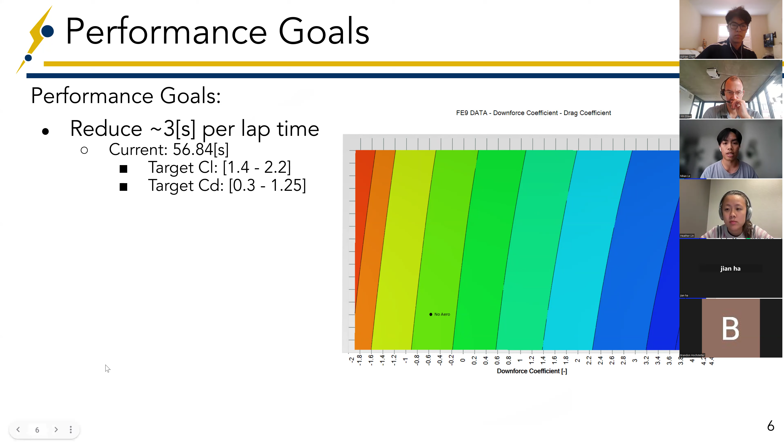Jian will talk about the front and rear design. So this is our current concept for our front and rear wing.

An issue we initially had was that our initial design had 3 elements for both our front wing and rear wing, but we had issues with our center of pressure being too far forward. So we decided that switching up the elements would help change the balance and bring it back, and also make a less aggressive airfoil setup. So our front wing now has 2 elements and a curved end plate for the trailing edge.

This is to ensure that airflow goes around our tires instead of hitting it. And then for the rear wing...

The rear wing has 4 elements, and in 2 slides I'll explain why I chose that specific airfoil configuration. The notch on the top trailing end corner is to reduce the vortex that forms off the edge, from the high pressure air spilling over on the outside of the end plate.

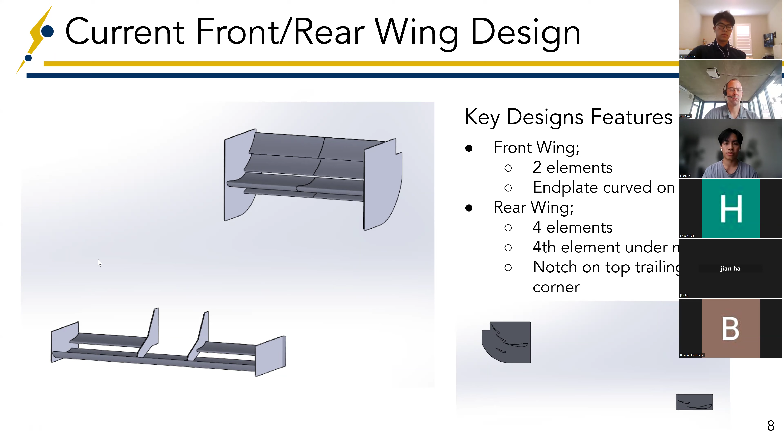For Nan, do you want to explain the under tray? Yeah, so for our general under tray design, the key features are a rear diffuser as well as venturi inlets and outlets. The side outlets are kind of a best of both worlds, helping with our side radiator cooling as well as improving our downforce.

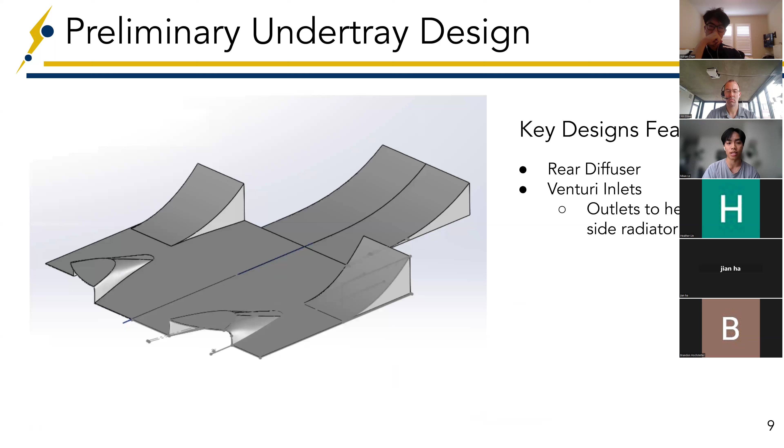This is the actual airfoil of the rear wing. We found that we wanted at most 2 different chord lengths, for composite sake, to make it easier to manufacture so we don't have to make so many molds and spend weeks and weeks.

So we decided that if we want to use multi-elements, we would use the same chord length for the secondary, third, and fourth elements. We went with 300 millimeters for the main element at -1 degrees angle of attack. The second element is 150mm at 35 degrees, the third is 150mm at 55 degrees, and the fourth is 150mm at 25 degrees.

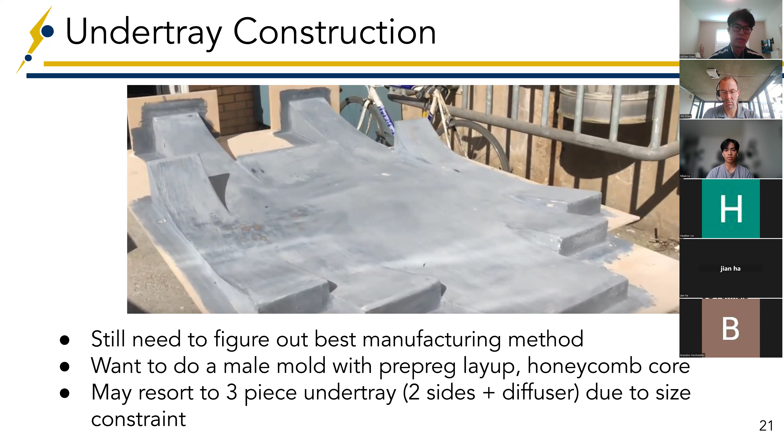Here's a small timeline for how we want to go about this. From now until around the second week of fall quarter, we'll start making our test pieces and our molds.

Since our airfoils are mostly dependent on chord length and span, we can get a head start on making those molds in fall quarter. Around the first month of fall quarter we'll start making the molds, and hopefully by the middle of fall quarter we can start laying those shells up.

Once those shells are done, we can start manufacturing the end plates and ribs, which are 3D printed and laser cut respectively. Finally, we can hopefully water jet our brackets out of aluminum. We'll spend our winter break catching up if needed.

Once our chassis is finalized, we can design our mounting brackets for the proper loads and location, and hopefully manufacture those around the start of winter quarter, where we can also assemble our front and rear wing.

Then we'll take about a month manufacturing the molds for the nose cone and front panel, and lay them up for the next two weeks respectively. Hopefully we have our main aero components installed on the car by the end of winter quarter.

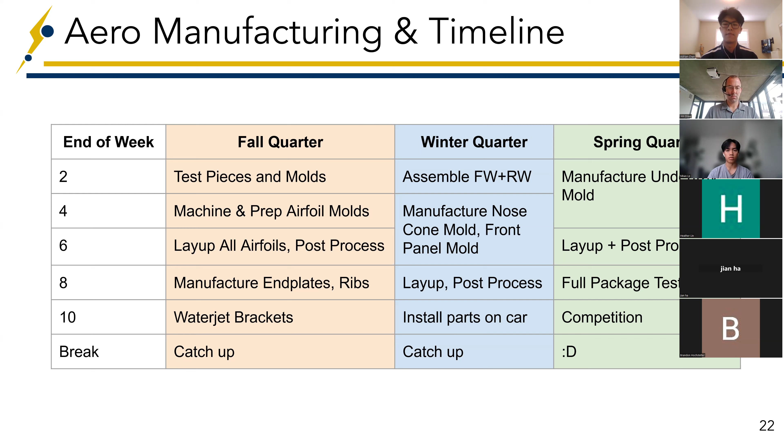That's all from me. Again, this is just a preliminary design, but I wanted to see if you have any comments, questions, or feedback.

I took 20 notes. Most of them are questions.

Okay, I'll start with the second half, Adrian. As far as manufacturing goes, I think you did a great job of explaining what you did and why you did it. I'll get to design and analysis, and to... I'm sorry, is it Jian? Yeah, okay, I'll get to Non and Jian second, but I'm going to start with Adrian here. Great job of explaining what you did and why. I'm leading, by the way, into the second half, right?

What's your plan of attack for different ply counts? You mentioned, I think it was the next slide or the slide after, that you're going to play around and experiment. Experimentation takes time, resources, money, and effort, right? So if you can reduce the amount of what-if scenarios, you can get it done quicker. Can you logically predict which one would be better, faster, smarter, whatever? That's with the process, wet versus pre-preg, right, and different ply count.

Set manufacturing aside for a second, that is a stiffness, strength, and weight optimization problem. So what are you thinking there?

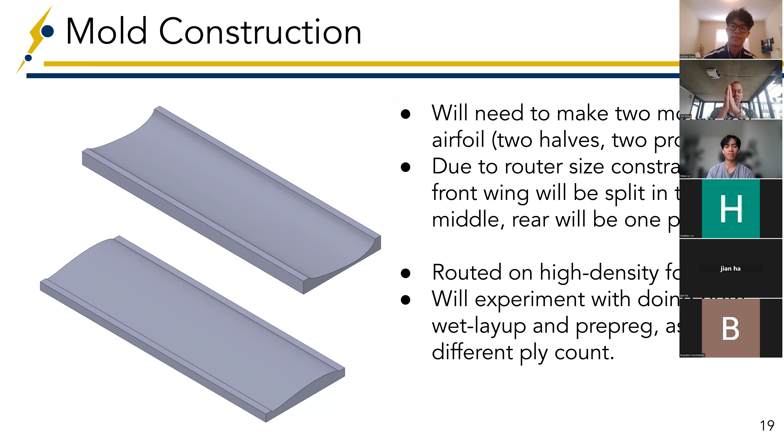Yeah, I mean, there's some simple hand calcs, right? A simple beam - a wing is just a beam, or a beam is just, you know, simply supported on both ends, for the rear, or however you're doing your mounting structure. Maybe you have a mounting structure in the front, in which case it's symmetrically simply supported. There's really, really simple hand calcs that will help you distill down to general order of magnitude. And you can do some simple hand, it's like linear math, right? Simple.

Fundamental, like just composite theory, right? And just say, okay, if I've got this layup, it's this combination of elastic modulus and bulk modulus - what's the stiffness of the structure, etc. So that's a simple stiffness and strength thing. You can just say, where's the max stress and can we handle it, right? And put some factor of safety on it. And you can easily calculate, you know, whether it's a foam core or is it hollow - should be hollow. So you can easily just calculate a corresponding cross-sectional area. So simple beam math, statics 101, just sort of a composite structure, just to get a ballpark.

Otherwise, with composites, nothing beats a quick and easy, dirty test. And I've actually seen a team do a quick layup, fasten it to the side of the bench and hang weights off it. And I know you're laughing, thinking like, well, what does that mean? Like literally, that's engineering. That's what we do in the garage. That's when we go racing. We want to know what's happening. And I don't want to make a perfect mold, go to an Instron machine, or use a third-party test house - all that extra money and time - just hang weights off and see what happens. Something as simple as that.

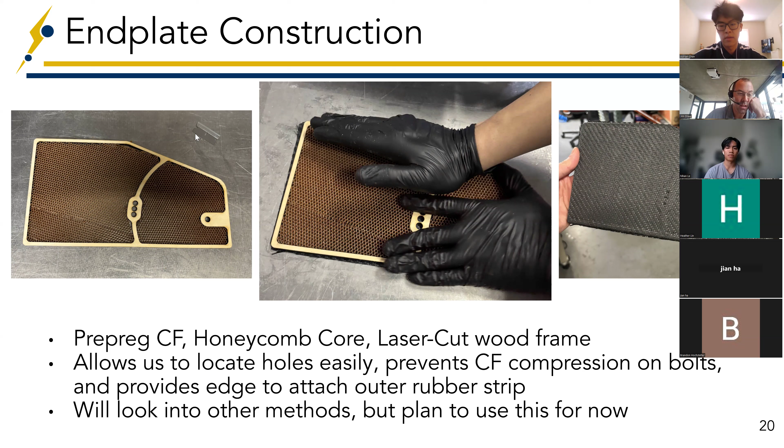So okay, that's it on the manufacturing side of things. The other 17 points of notes that I made, guys, are for the design and analysis side. So let's go all the way back to the beginning. Okay, let's go to the next slide. At first I wasn't putting slide numbers in, so I'm sorry. Yeah, go to, okay, right here.

Weight goals, where do these come from? These came from me. At comp this year, I was asking a lot of different teams what their weight goals were or how heavy their aero packages were. These were kind of the upper end of what I heard from teams, and I kind of wanted to set this as a target for us to beat, which should be pretty easy. I know a 10-pound front wing can be a lot, but one of our older alumni tried making a front wing, and it was also around 10 pounds. So we wanted to set that as our upper limit and try and shave weight from there.

If this is going to be your story, if this presentation is part of the story you're bringing to the design part of the competition, make sure you're ready to tell that half. Because whenever I see a goal, I always ask why, or where did that come from? And weight goals in particular, especially with a team first year Aero, I know you don't have years and years of historical data of manufacturing methods. So I'm already thinking to myself, like, where do these numbers come from?

Research is okay. Engineering, when we're doing stuff for the first time, we only have research, right? We don't have data. So going around and asking teams, I think, is okay, as long as you do many teams, and to your point, you're conservative with the numbers there. And then I'd like to also see, if I have my design judge hat on, by the way, we just told the team that we're going to add 45 pounds to the car.

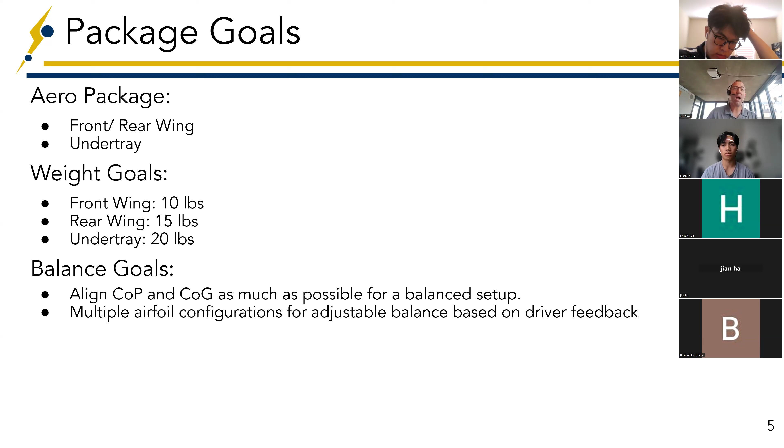That just means plow it. Come out of that turn, full throttle, and plow it, and you know that the car is going to be nice and settled, as opposed to plowing it and all of a sudden you get lift in the back, which would be very dangerous but fun.

Does that make sense? So I don't think this is going to require a massive design change per se, because you could probably just tweak a little bit of an angle of attack, which is an easy change to make in July. It's really easy to make angle of attack changes. Even if you decided on your airfoil profiles, you can just play with angles of attack and change that balance pretty easily. But I think you need to reassess your goal of putting the CP on top of the CG, especially since in a couple slides, you didn't know where the CG was.

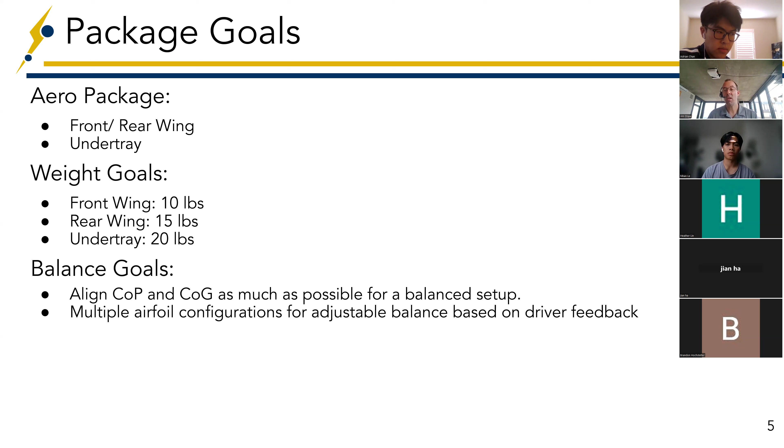That's a problem. That right there is a problem. And is the CAD like 75% complete, or what? Why don't you know where the CG is? That to me is a huge question mark.

Okay, so we do have the CG from last year, but the chassis that we're designing now is pretty different. The geometry is really different as well, and we just don't have the numbers because the CAD we worked on was only the space frame chassis. It didn't include the accumulator and its weight, the driver, or anything else.

Forget the CAD. If the CAD isn't like 80 or 90% complete, then it's not a helpful tool in telling you where the CG is. Really easy Excel math can help you. So what's the total weight of the vehicle from last year, or roughly this year?

640 pounds total weight of the vehicle? It's like around 280 kg. So 280 kg, okay. And that's with no driver.

So you got 280 kg. Now you got a driver that's going to weigh somewhere around what, 75? Maybe between, I don't know how small the driver is, right? 50 to 75 kg.

So think about it like this. You know where the CG is of your frame or your total vehicle. Now look at the largest sources of that weight. You got a driver, which wasn't in that number, you got your accumulator, which is just a big hunk of solid mass, and that's located somewhere. You just go down to last year's car with a tape measure, and then draw it out on a chalkboard or on screen or something and say, side view.

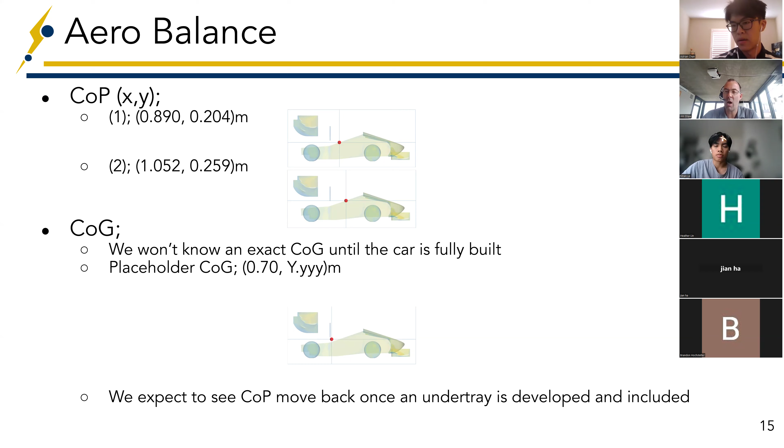Which was basically the number of aero elements and understanding how much downforce you wanted. What I always tell teams, which I don't see enough, is a side view. I would love to see a free body diagram. That free body diagram is going to say, I've got my center of gravity with some level of confidence and the reaction forces on the wheels. And I have my center of pressure of the front wing and its location, the center of pressure of the rear wing and its location, and the center of pressure of the diffuser tray, etc., and where that is.

It's literally 1, 2, 3 points that represent your 3 aero elements, and 1 point that represents your center of gravity. That simple picture and that simple free body diagram, for both downforce and drag, is such an important way to communicate how you approach what you expect for performance in the front wing, what you expect for performance in the rear wing. And those things will guide you.

How many elements in the front wing? How much downforce do we need to get? How many elements in the back and downforce? Because every time you add an element, you add mass, right? Adrian's got to justify that. He's got to build these things. He's going to add mass to the vehicle. And again, in the rear, it's above the CG, so you're raising the CG. Particularly with the fourth element that's below the other elements in the rear wing, I want to challenge that a lot, just because of how dirty that air is.

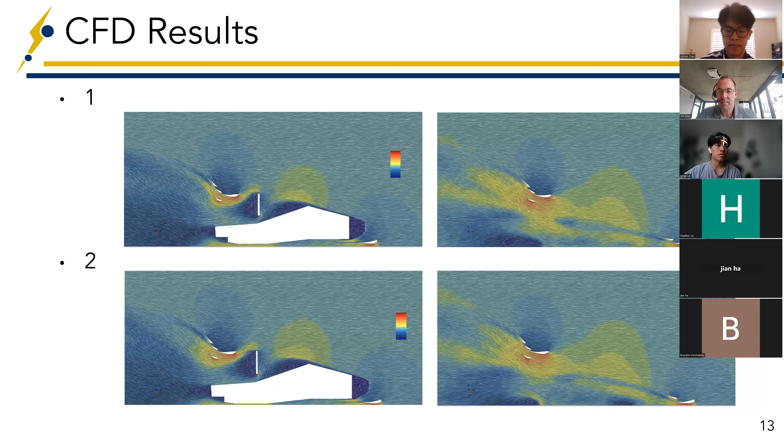Angle of attack slide. Let's get some pictures, if there's a way to communicate, go back one. There's sort of a matrix of different ways of doing angle of attack. I think it was something like this. I'm having a tough time absorbing this information, it doesn't have any context for me. So if there's a better way, you can have tables, because tables are a nice way in engineering to show data, but have some pictures in here too, just so I can understand what your sweep was and why. I see 0 to 30 on your winglet, but which winglet, where on the vehicle is it? Just a picture to give me some context. That's just engineering communication.

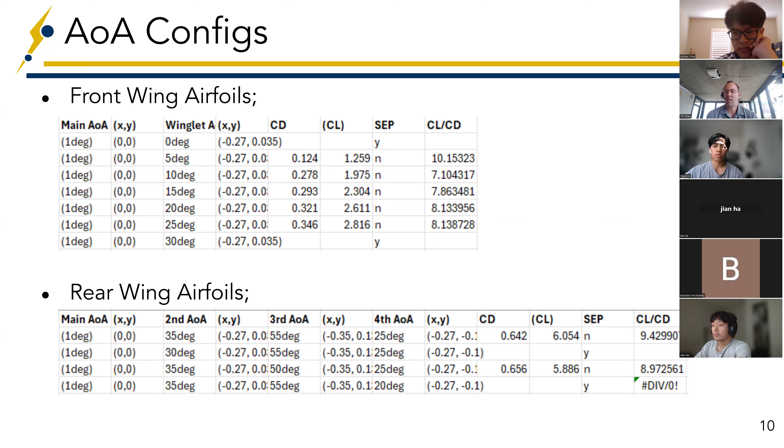Before you start showing any CFD, you've got to explain the CFD setup. You've got to explain, hey, this is our CFD model. Here's the inlet velocity, what is it and why. Here's the turbulence model that we used, and here's why. 2D models are good for just getting a general understanding, for beams and slot gaps, but you can't get accurate forces out of a 2D model, and you can't really get accurate turbulence out of it. So if you're doing 2D, that's totally fine, but make sure you understand it's a limited accuracy level, just because the real world is 3D. And in particular with fluids, turbulence is a 3D thing. There's no such thing as 2D turbulence.

Vortices don't care, they're just going to do their thing in all three dimensions. So as soon as you do a 2D sim, you can get some information, there's a way to mathematically account for turbulence, but there's going to be an automatic error in there. Just recognize that and be ready to talk about it, because if you show a 2D sim to an aero judge, they're going to ask what did you do, why did you do this? It's okay to say our hardware and computing resources aren't high enough for us to be doing 3D sims all day, every day. We're realistic about what information we're getting from a 2D sim, which is understanding general proximity, like slot gap, and general angle of attack. I don't think anyone's going to say anything negative about that.

You've got to be able to explain ground effect, what it is and why. Basically we've got an airfoil, right? In an airfoil in free stream, you've got a certain amount of acceleration, like you're showing right now, a certain amount of flow acceleration. As the velocity goes up, the pressure goes down, that's how it works. So as we accelerate the air underneath, in free stream, your acceleration is only due to the longer path it has to take, the shape, or the camber, of this profile. So ideally, more camber, more Bernoulli effect, more acceleration of the air.

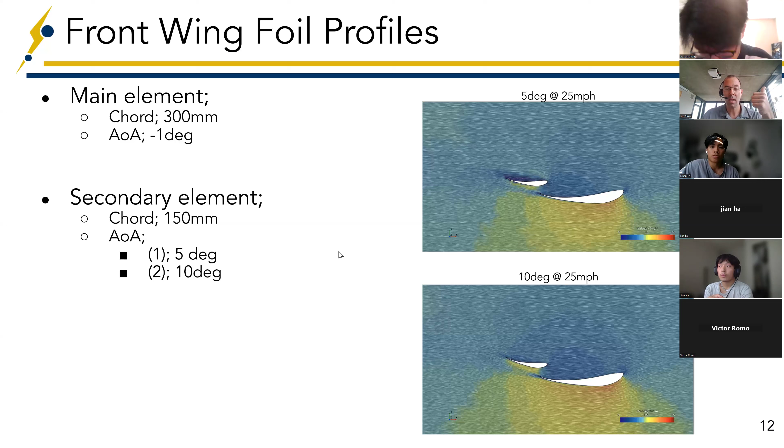Yeah, I think those are the big ones, right? Conversation around CG location and CP and their relative locations. The CP is going to migrate as a function of velocity. Go to slide 17.

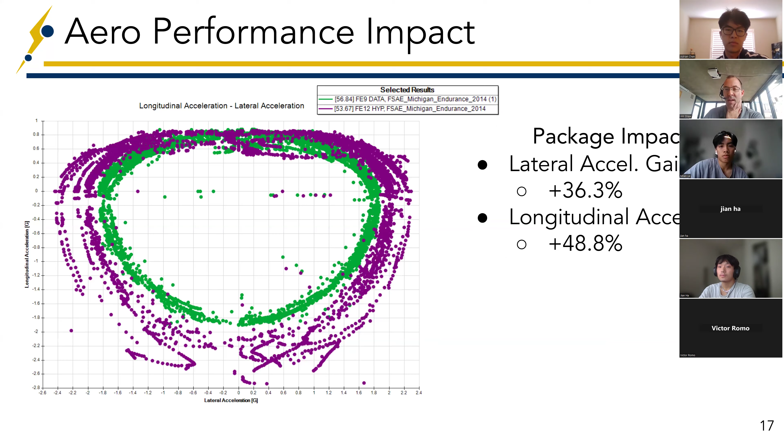All right, we're just 5 minutes over, but does that help out, guys? Yes, no, yeah, definitely. That's amazing, definitely advice. Cool, yep, awesome stuff.

Well, I think you guys are off to a great start, and I'm super excited to see you guys kind of refine the story a little bit, reanalyze sort of CP location and its role. Do some fundamental free-body diagram stuff. Recognize the source of error in your CFD, right? All CFD has error in it, no matter how complex the model is, and just be blatantly transparent about it. All models are wrong, some are useful, is what we say, right?

And even with a gigantic aero map of yaw sensitivity in 3D, which is kind of the dream, at the end of the day very few teams have the knowledge, the hardware, and the resources to execute that. So just recognize that you're doing sims, you're doing predictions, and whenever you're talking about performance, the keyword is predicted. Unless you have hard test data, make sure you're not implying that this is the performance. It's not.

This is the predicted performance with the simulation, which is why it's important that before you start showing simulation results, you have one slide that explains the simulation and tries to prove its credibility as a tool. Because if you can't prove the credibility and understand the accuracy and the error in the simulation tool, everything after that is like, here's my buddy Joe, and Joe's opinion is this. It's like, all right, well, hang on tight.

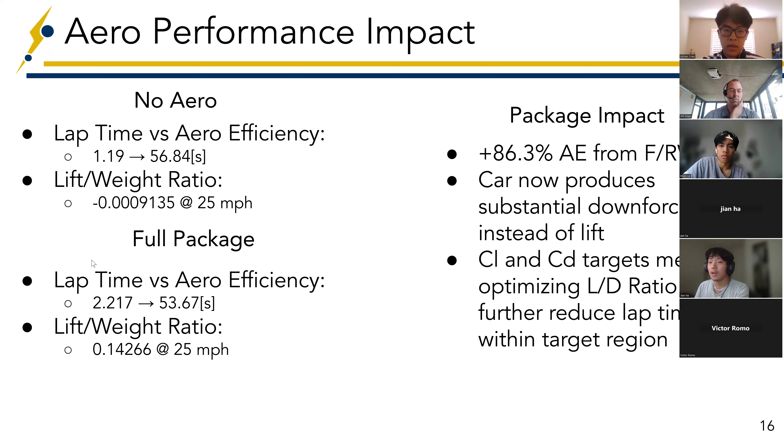I just wanted to ask if you can give us some pointers on what we could do to help prove the sim's credibility.

Yep. So you're going to want to talk about the mesh a little bit, and you're going to want to talk about the turbulence model, which should be K omega SST. That is the generally accepted industry best practice for what we call a bluff body in ground effect, which is the fancy way of saying a race car.

And there is a certain parameter that we are very interested in with respect to the accuracy of the turbulence model. The turbulence model is the part of the math that predicts how turbulent the air is. And how turbulent the air is going to impact whether the air separates from the low pressure side. Because if your angle of attack on the third element is too high, and you have not accurately modeled the airflow on the low pressure side, on the bottom side of your elements, you're going to separate in real life even though your CFD doesn't show separation.

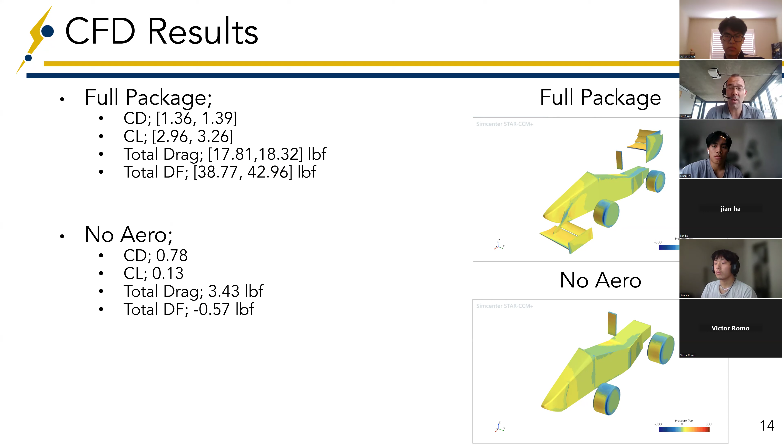So when I see something like the third element at a 55-degree angle of attack, which is what you showed me, man, if your model's wrong, A, you're not getting the downforce you think you are, and B, you have less downforce than you think and more drag than you think you do. That's the one area that is the most critical in CFD for these types of cars: the second, third, fourth element in a multi-element. It's such a high angle of attack, you're at such high risk of separating the air. And as soon as you separate the air, that element is dead to us, doesn't do anything. And your downforce and drag numbers are off, potentially by a lot.

If you were to ask me, hey Jim, can you do an analysis on this rear wing, this is the information I'm going to tell you. Here's the contribution of downforce from elements 1, 2, 3, and 4. That's the level of detail we can get from CFD. The total downforce, 30 pounds at 25 miles an hour. Of those 30 pounds, I'm getting this much from the front main wing, this much from the second element, this from the third, and this from the fourth. You know what I mean?

And then you can start to understand, like, my CFD predicts that 95% of my downforce comes from that third element at a 55-degree angle of attack. If my model of that element is wrong, then my whole CFD model is wrong by 95%. Ouch. You know what I mean?

And how we understand if you are accurately predicting potential separation is by using the right turbulence model. K omega is the right one. K omega SST is a version of it that's a little bit more efficient, so do the homework on that. And then the K omega SST turbulence model and the mesh size have to be on the same page. If your mesh size is too coarse, all bets are off. And the parameter we look at is called Y plus. Have you heard that term before? No, I don't recognize it.

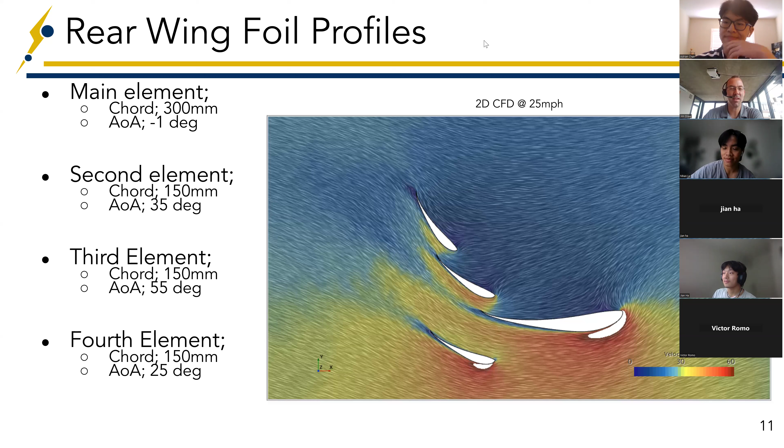Yeah, we'll keep in touch with you with that. Sounds good, awesome, thank you so much again, Jim. Yeah, thank you, it was amazing. Absolutely guys, thanks for reaching out. Good luck, and yeah, we'll stay in touch. Awesome, all right, bye.

I gotta go to work. Oh my goodness.

He was talking about a lot of things that we just forgot to put in. Yeah, like the center of gravity, right? Yeah, and also like, what's it, like a lot of the CFD stuff. I had answers for some of them, but I guess I should have put it on the slide.

I mean, at least we know that, or at least we have those answers, and it's not like we don't know. Yeah, I think it's just preparing the slides more. How do we stop this recording?